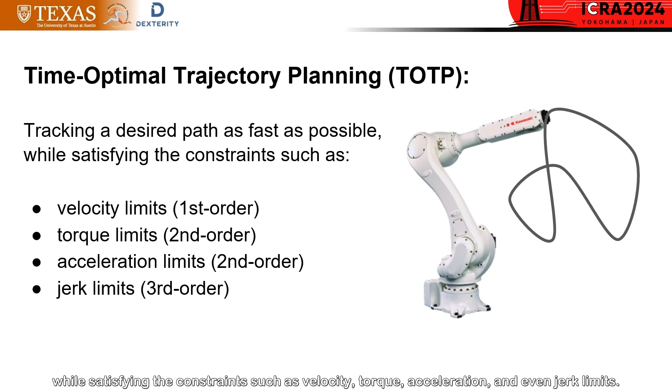Let's begin by introducing the problem we are aiming to solve. In this paper, we focus on solving time-optimal trajectory planning, which is the problem of creating trajectories along a desired path that are as fast as possible, while satisfying constraints such as velocity, torque, acceleration, and even jerk limits.

Now let's move on to discussing the most typical way to solve the TOTP problem. First, given the path to track, we can parameterize the joint path Q as a function of a path parameter S. Then, our problem is reduced to finding an optimal S of t from Q of t, which is much simpler because S is a scalar.

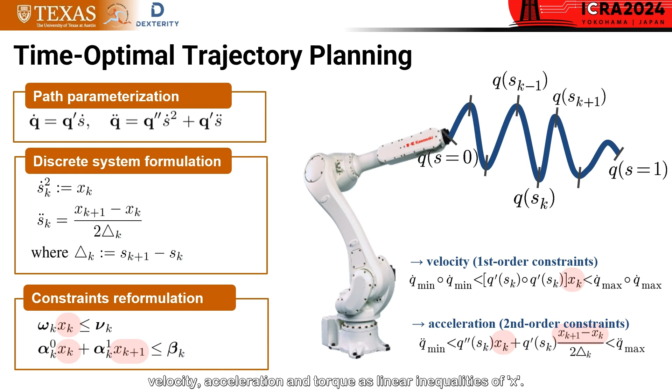Then, the joint velocity and acceleration, which we are interested in constraining, can be represented as functions of S dot and S double dot. Considering the discretized system along the path parameter variable S and defining S dot squared as the optimization variable X, we can rewrite the joint velocity and joint acceleration as a linear function of X. Therefore, we can reformulate first and second order constraints such as velocity, acceleration, and torque as linear inequalities of X. Finally, the TOTP problem is reduced to a simple linear programming problem with second or lower order constraints.

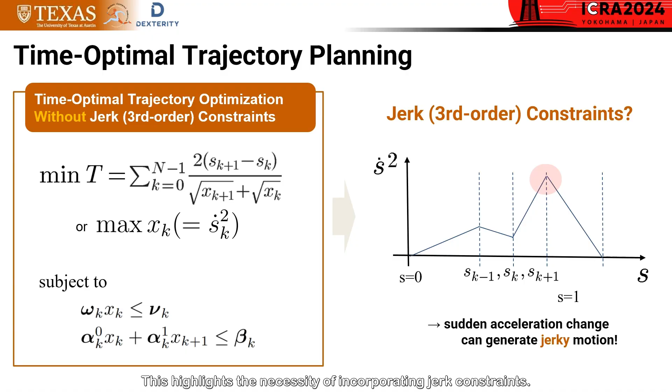However, by constraining up to second-order constraints alone, we cannot prevent sudden acceleration changes in the robot trajectory, which can lead to jerky motion. This highlights the necessity of incorporating jerk constraints. Here is a video that shows an example of what could happen due to jerky motion in industry.

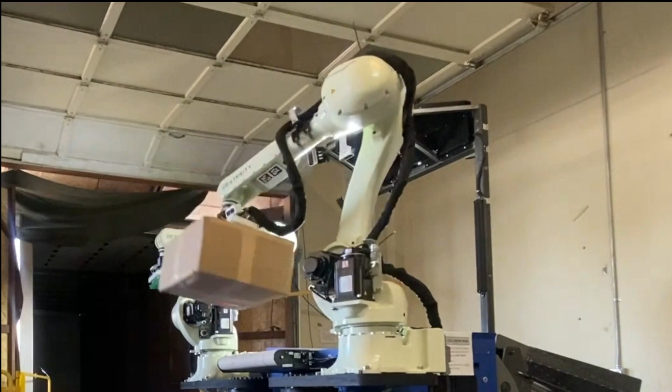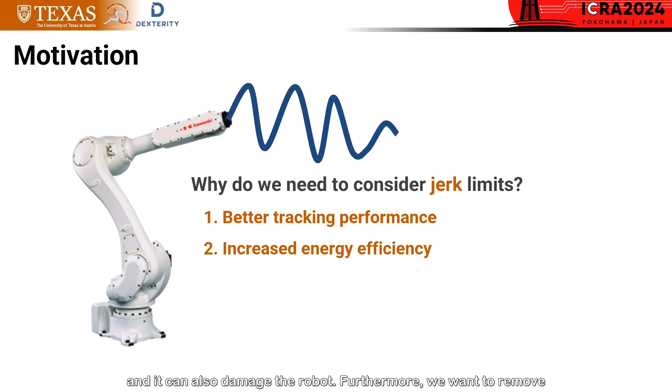As you can see from the video, there are several reasons we need to include jerk constraints in the TOTP problem. First, we want a robot to track the given trajectory as precisely as possible. This is because undesirable spikes caused by poor trackability can result in energy inefficiency, and can also damage the robot. Furthermore, we want to remove jerky motion to improve task success rates for tasks such as grasping objects, grinding, welding, dispensing, etc. To sum up, to ensure the robot follows the specified path as quickly, smoothly, and safely as possible, we impose up to third-order constraints during time-optimal trajectory planning.

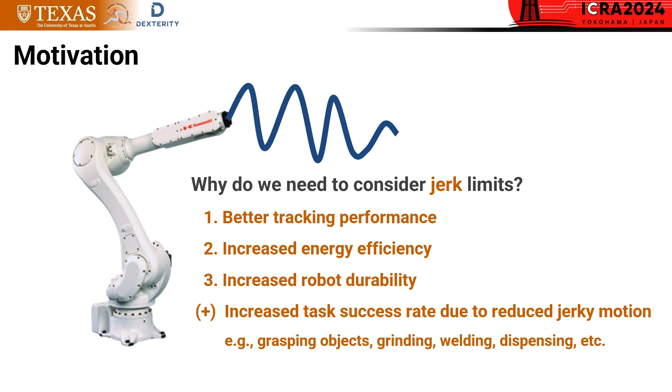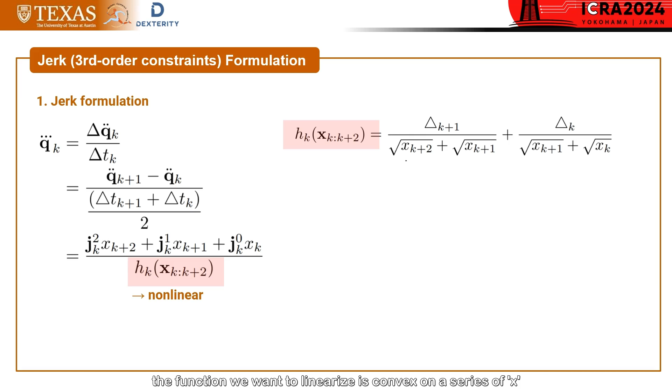To address the issue, we linearize this nonlinear term using the fact that the function we want to linearize is convex on a series of x, which makes the real value always greater than the approximated value. Using this property, we can formulate tighter jerk constraints to ensure that the solution obtained with the approximated constraints always satisfies the original constraints as well.

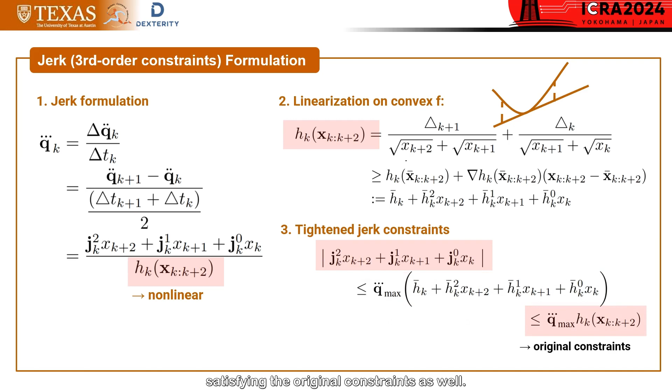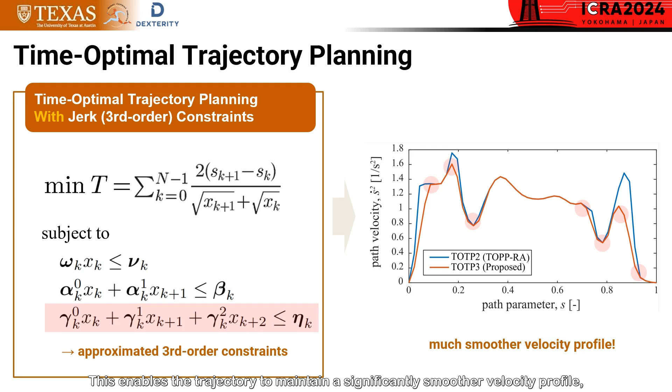Now we can add approximated third-order constraints to the time-optimal trajectory planning, formulated as a sequential linear program where the linearization is required at every iteration until convergence. This enables the trajectory to maintain a significantly smoother velocity profile, as demonstrated by the plot figure on the right.

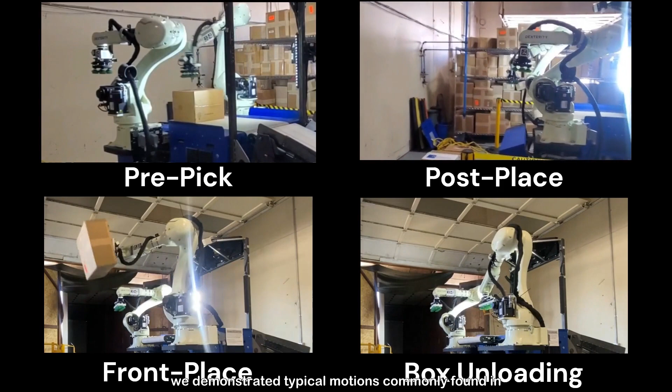Now let's move on to our interesting experiment results. To validate the performance of jerk-constrained time-optimal trajectories in real applications, we demonstrated typical motions commonly found in warehouse automation, with and without jerk limits. We will first check how the TOTP results vary with and without the jerk limits.

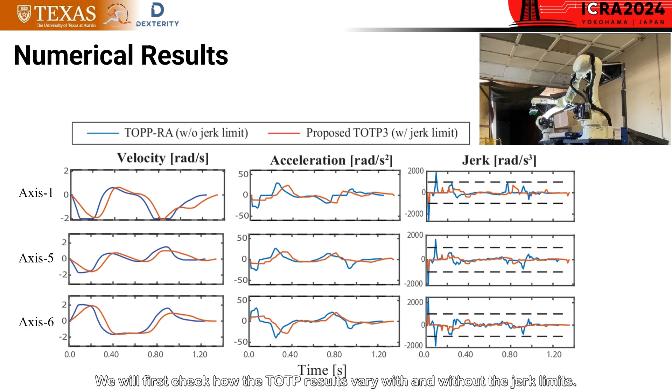These are plots of velocity, acceleration, and jerk from the resulting trajectories for a front place motion. First, you see the proposed algorithm can constrain the jerk well, and this allows gradual change in acceleration, making the velocity profile much smoother, especially around the corner.

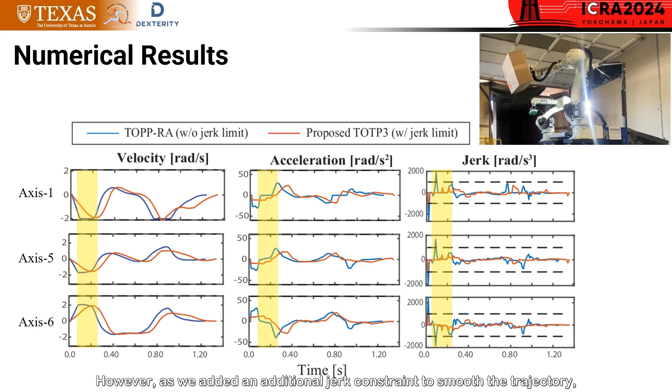However, as we added an additional jerk constraint to smooth the trajectory, the overall motion time was increased. Based on the sample motions we have tested, the motion duration, after adding jerk constraints, increased by around 3 to 5%. Additionally, due to the complexity of the problem, computation time also increased.

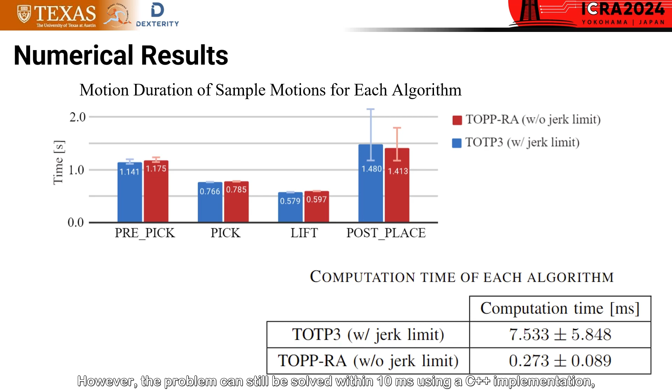When imposing jerk limits, we found that the computation time increases significantly by approximately 30 times. However, the problem can still be solved within 10 milliseconds using a C++ implementation, which is entirely acceptable for practical use.

All right, it's time to share the most exciting part of this paper. To validate the tangible benefits of constraining jerk, we compared tracking performance on a real Kawasaki robot running the same path with and without jerk limits. Firstly, we compare the actual velocities of the robot.

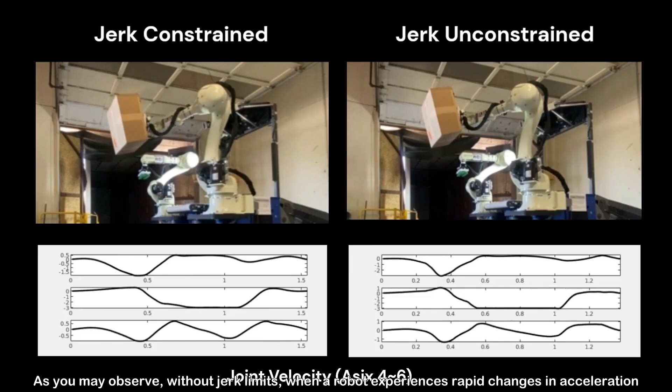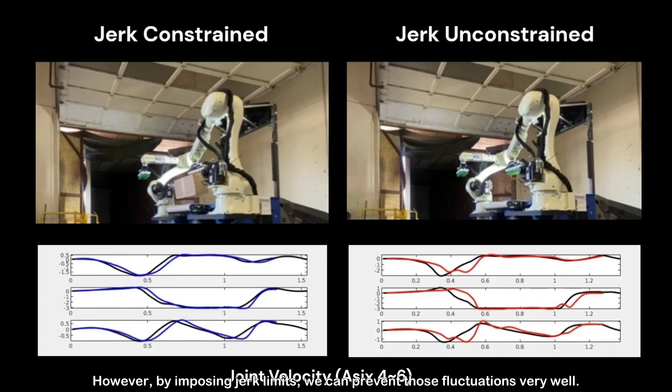As you may observe, without jerk limits, when a robot experiences rapid changes in acceleration, it begins to deviate from its desired trajectory, resulting in overshooting and fluctuations. However, by imposing jerk limits, we can prevent those fluctuations very well. Consequently, the torque generated with jerk constraints tends to have less fluctuation, thus providing better efficiency in its usage.

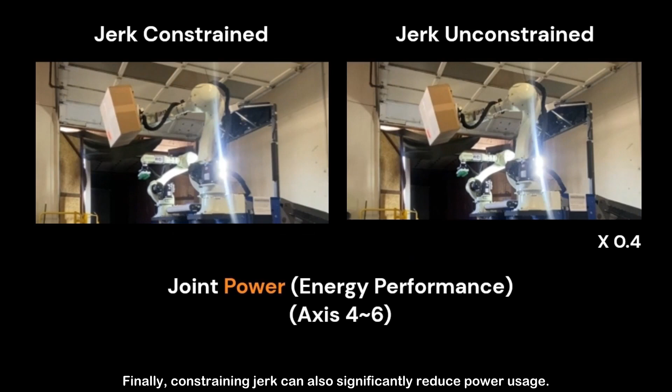Finally, constraining jerk can also significantly reduce power usage. The experimental result shows that peak power can be decreased to 40% when jerk limits are applied.

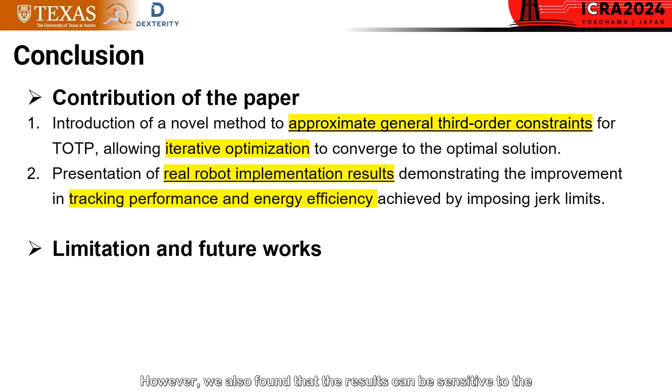So these are our conclusions. First, we introduced a novel method to approximate general third-order constraints for TOTP, allowing iterative optimization to converge to the optimal solution. Then, through real robot implementation results, we demonstrated the improvement in tracking performance and energy efficiency achieved by imposing jerk limits. However, we also found that the results can be sensitive to the discretization and splining of

the path parameter variable, so in the future, we may want to explore optimal path parameterization, potentially co-optimized with the rest of the TOTP algorithm. That's pretty much all I had to present. Thanks for your attention.